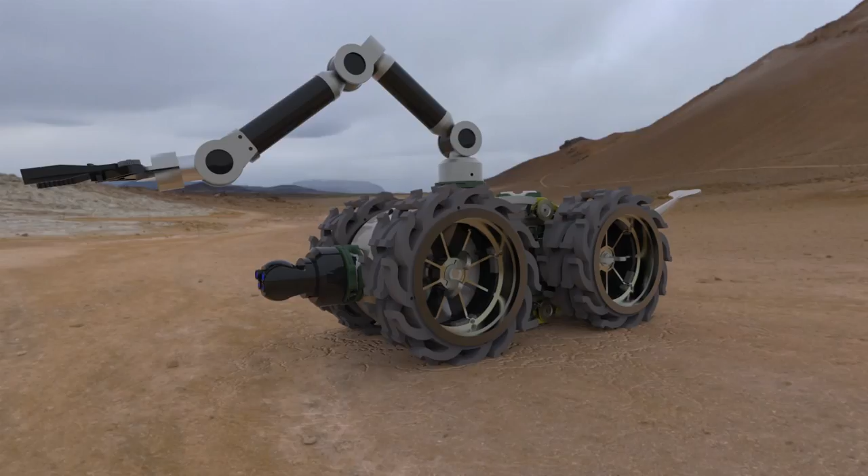Solid Edge ST8 strengthens its industry leadership in efficient 3D product design. This latest release further integrates synchronous technology into proven large-scale assembly modeling techniques.

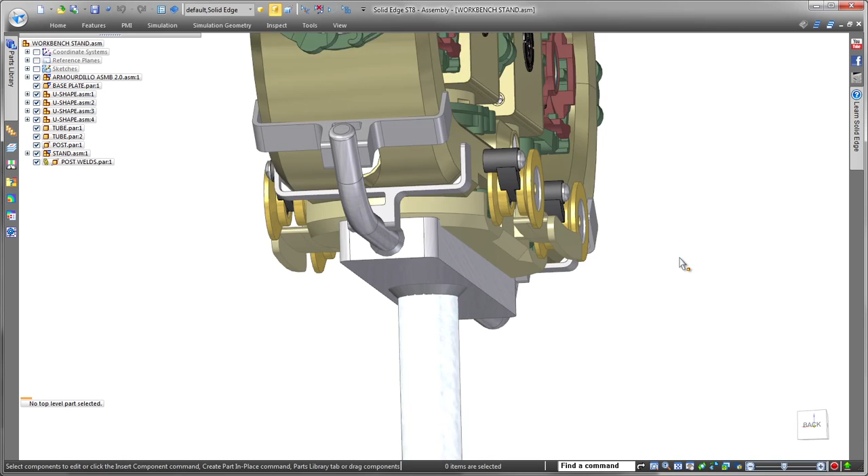In this demonstration, we'll make several changes to a workbench stand supporting a recovery robot's chassis. New time-saving file open functionality identifies top-level assembly files, letting you quickly retrieve the overall assembly without having to search through a long list of subassemblies. Here we'll open the top-level workbench stand assembly.

Leveraging the power of synchronous modeling speeds design changes. To stabilize the workbench fixture part, we'll widen its base just by dragging its side face, and we'll define a small offset to get an exact fit.

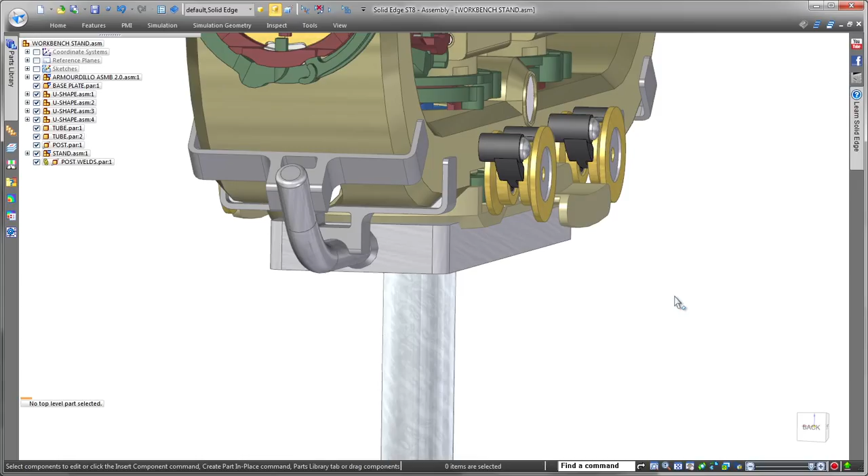Solid Edge specializes in providing all the tools you need to work on a part within an assembly. We'll activate the base plate part to implement some changes. Notice how Pathfinder indicates your active position within the assembly structure.

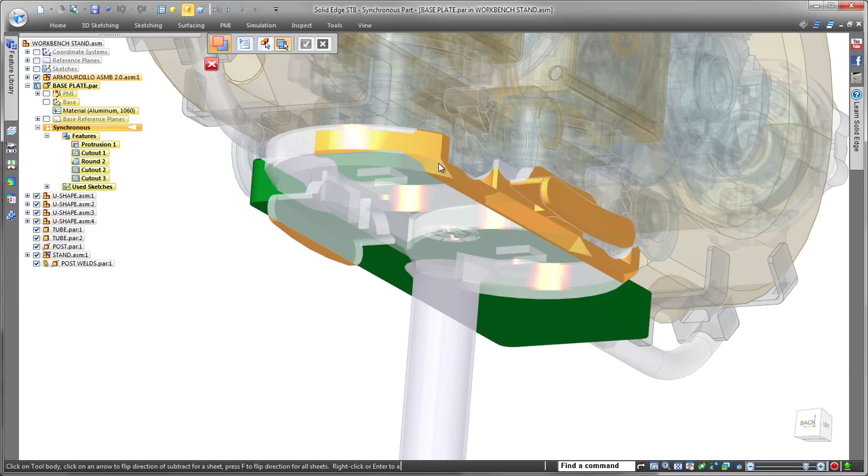Here, we want to remove material from the base plate to ensure a tight fit between the stand and robot chassis. We'll subtract material using the bottom of the chassis. Access to the top-level assembly components was crucial to get the correct result. Notice the result after removing material using the top-level assembly components. A perfect fit. This approach produces accurate results and maximizes your productivity.

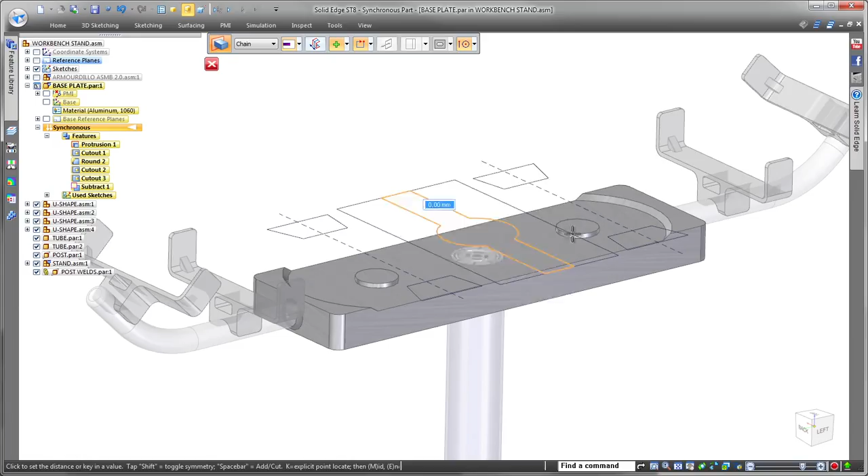Design reuse averts time-consuming and costly model recreation, so we'll make use of geometry already present in the top-level assembly. Watch as we use sketches from the workbench stand to create a relief pocket on the base plate and remove unnecessary features. Finally, we'll add some rounds to remove sharp edges and finish the base plate. With Solid Edge, working on subsystems and components within a large assembly is efficient and very fast.

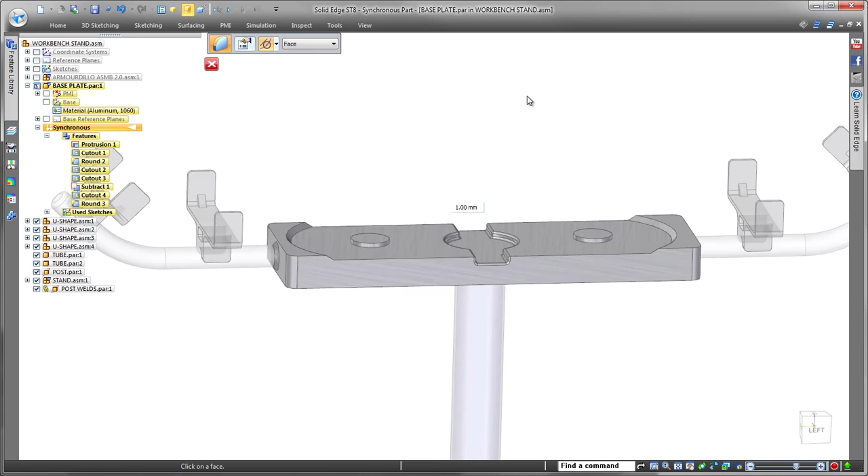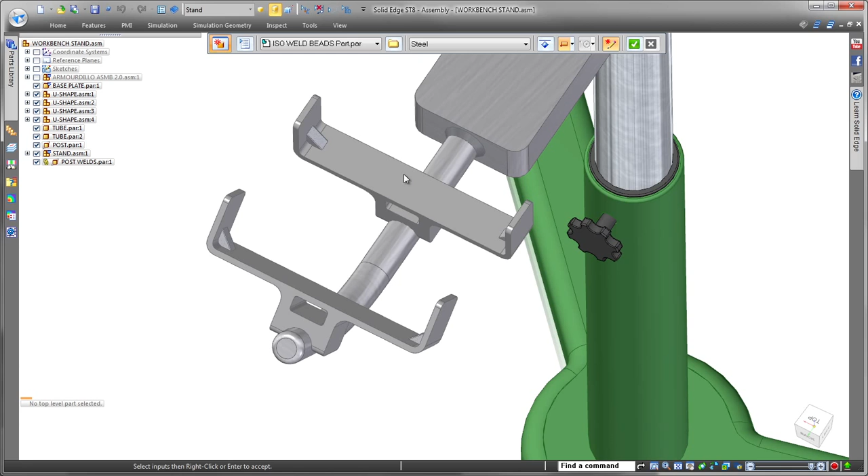Streamlined weldment design is delivered in Solid Edge ST8. The ability to create weld beads within the part environment gives you flexibility with the use of standard weld bead commands, part modeling techniques, or a combination of the two.

With weld beads defined in the part environment, you have full control of the material definition, appearance, and access to their mass properties. We'll continue to work in a top-down design scenario, as this gives easy access to the assembly components. Here we'll create weld beads between top-level components while in the part environment.

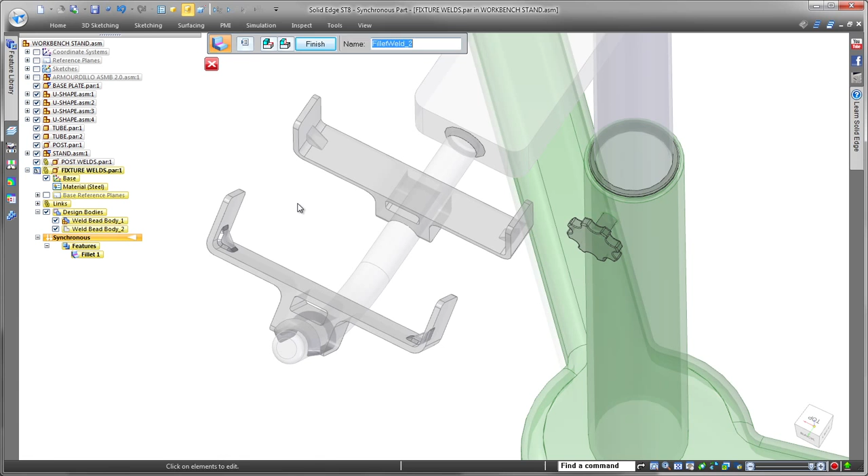Their material is defined in the part, not the assembly. Now that we've applied weld beads to one component, we can expedite the welding process to the other side with the use of duplicate part. Now that's easy, it's fast, and it greatly streamlines the welding process.

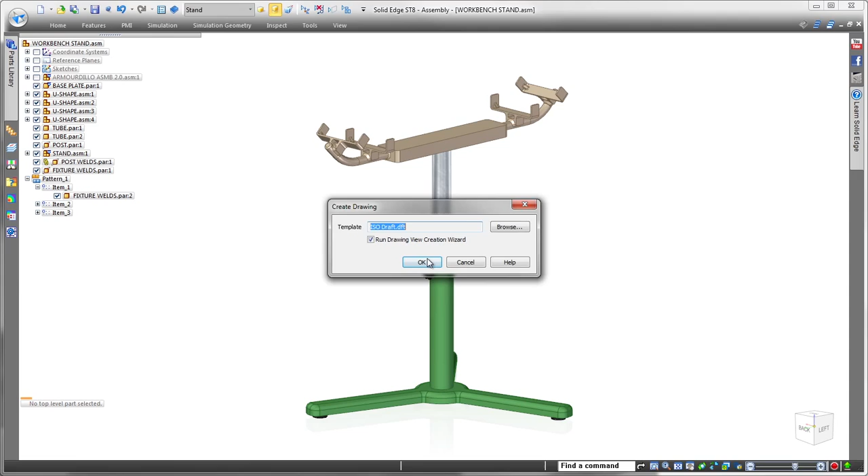When you need to efficiently document your weldment scenario on a drawing, Solid Edge shines. Watch as we place standard and auxiliary views with minimal mouse clicks. We'll apply a cutting plane to the front view, and from that cutting plane we'll pull a detail view to note information about the weld beads.

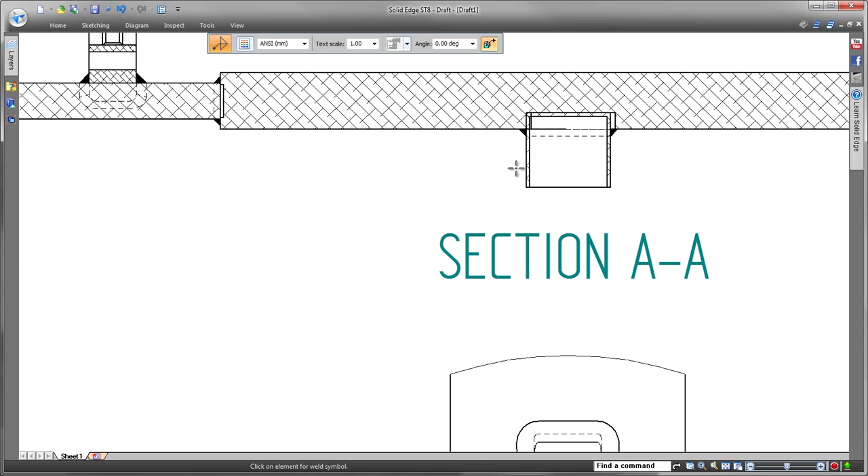Since we can extract weld bead information directly from the model, we save time and cut costs by avoiding duplication of effort. If a design change is approved, it'll be reflected throughout Solid Edge.

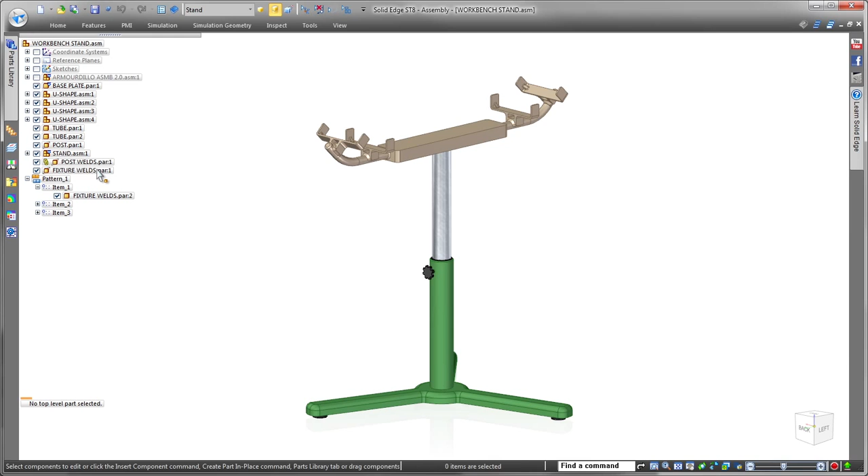Watch as we return to the assembly and increase the weld bead size between the post and fixture. Back in the draft environment, we're notified that a dimension moved, but also notice in the parts list the weld bead weight and cost also reflect the changes.

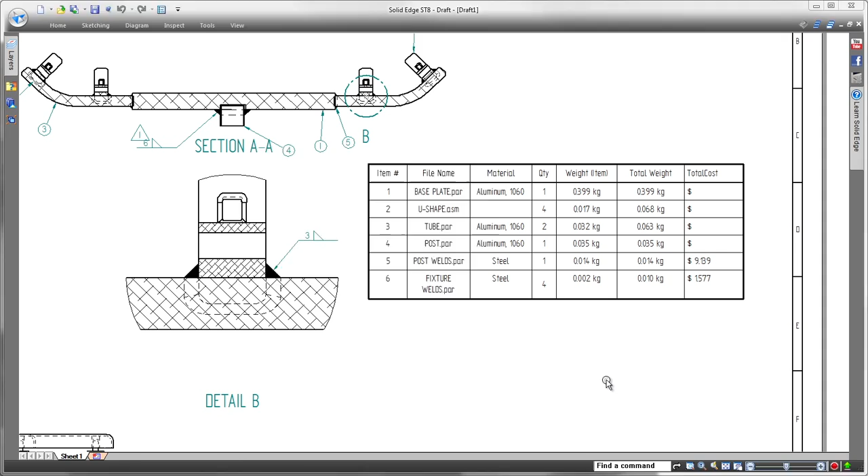Solid Edge with synchronous technology frees you to design more productively with the best tools and technology to get your job done right the first time. Solid Edge. Design better.